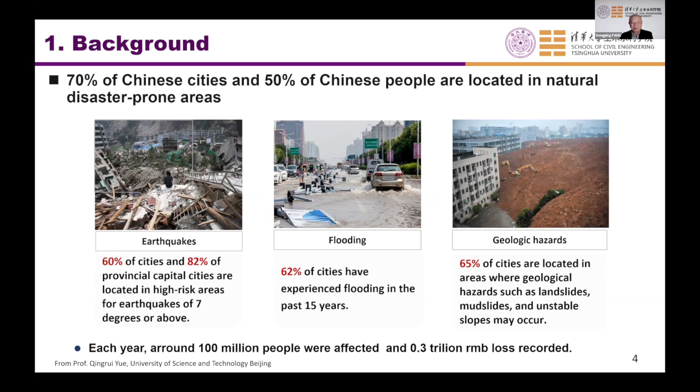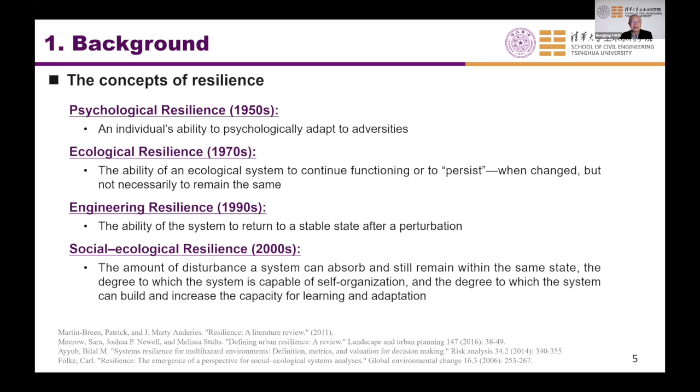It's defined as kind of the intrinsic property of a system. The system can be an urban system, can be an infrastructure system, as much as you can define. Function or functionality is another keyword that describes the goal and provides a measurement for the goal that could be reached. I'll explain a little bit later.

Disturbance specifies the context or type of disasters, such as flood or earthquake. The context can be very different because of the disasters. Resist and absorb is another keyword that stands for when disturbance comes, the system is able to resist or absorb the negative impact by itself. So by itself is a very important concept because we differentiate from outside aid.

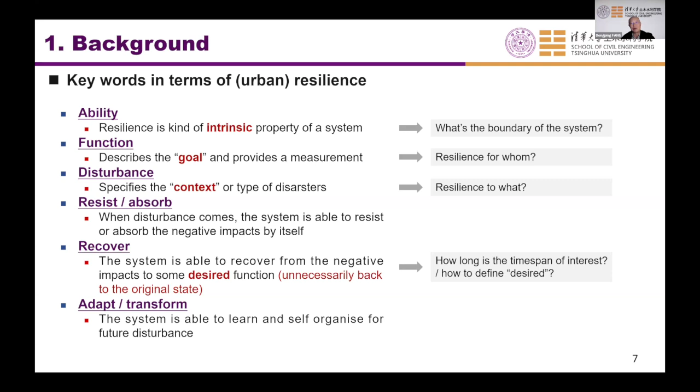So then, as for recover, it's related to how long is this time span of interest. The recover can be forever after disaster, especially for large major disasters. And then how to define desired functionality of a city — I'll answer all these questions alongside my presentation later on.

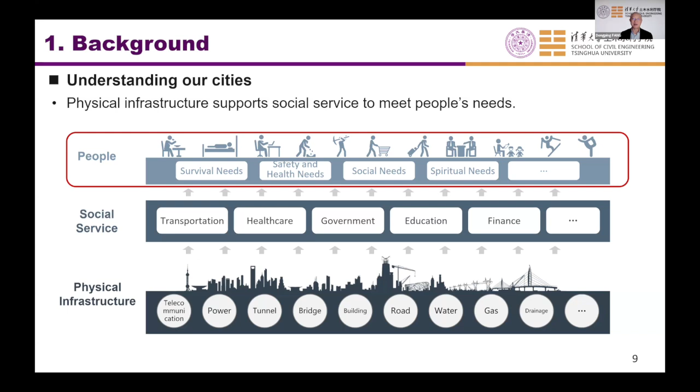And then there's another perspective called system of systems for understanding our cities. In a city, all the systems, different kinds of systems, have their role or functionality to serve the country, to serve the city. And they are all interdependent to some extent. So this is the figure to show you how they interdependent.

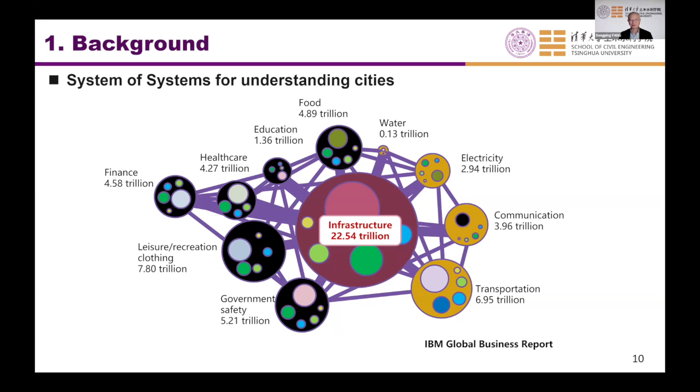And let's change to another perspective — that is what I call trio-space. That means we as engineers pay much more attention to physical spaces. It's related to natural environment and our built environment. It's all physical. But the city exists because of people living there. So the societal space is an unneglectable part of the city. So I call it the social space.

And in modern life, cyber is a must for all the citizens. So cyberspace is another one. It refers to the digital mapping to reflect the status of physical and societal spaces — the digital twin refers to this. But the cyberspace also supports the communication and operation of physical and societal spaces. So it's easy to understand because we all live in the city.

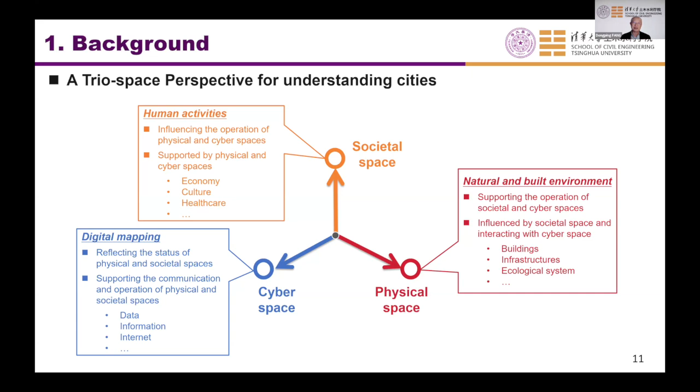So I showed you several kinds of angles to understand cities. I'm trying to bring the three perspectives together. First, put the system of systems into the trio-space, so we can have such a view of our cities. We call it the system of systems in trio-space.

This is a brief introduction to understanding the background of urban resilience, and the methodologies we used to conduct research in this area.

I started with two critical questions. First, how do the effects of natural hazards spread across different engineering systems, meaning physical systems, and across both physical and social dimensions, and what's vital. Second, how to better use limited resources, because no city, no local government, even national governments, have sufficient resources for resilience. Resources are always limited.

It's always the case that cities put resources into improving their safety and resilience, but may not do so in a very optimized or effective way. This is what we are trying to contribute to urban life.

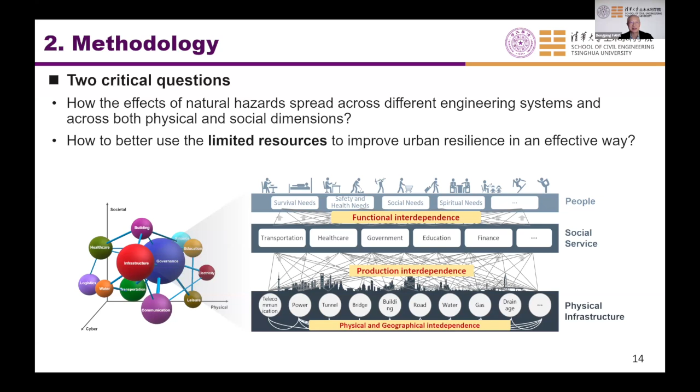In this figure, you can see the interdependencies, both physical and geographical, production interdependence, and functional interdependence. We are facing a very complicated system, so now the question is how to tackle this kind of complicated issue.

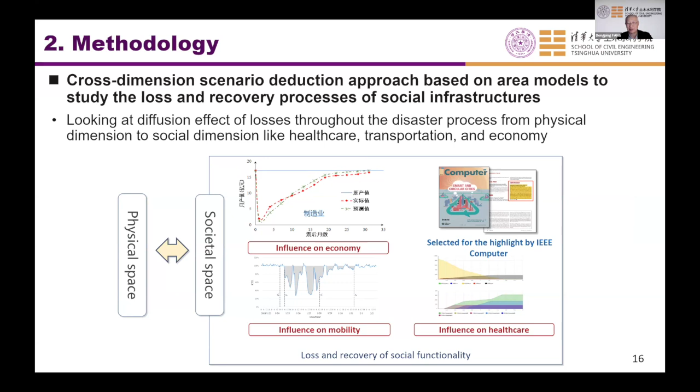So the second approach was developed, the cross-dimensional scenario deduction approach. This models the propagation of disasters from physical space to societal space—that is the cross-dimensional part. We used area models to study the loss and recovery process of social infrastructures, looking at the influence on economy, mobility, and healthcare systems.

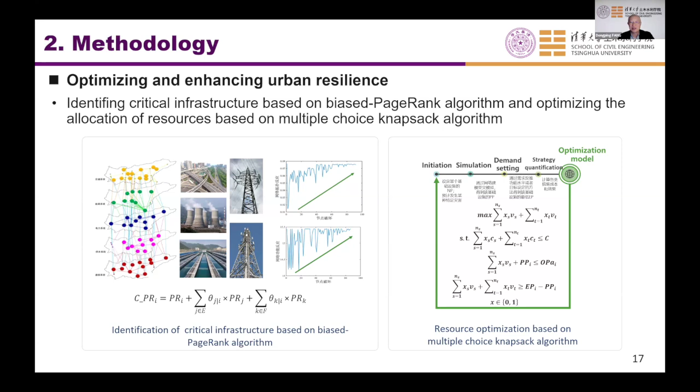We also developed methodologies to optimize and enhance urban resilience. Optimizing means we try to allocate critical infrastructure so major investment can be directed to these so-called critical infrastructures. We use a biased PageRank algorithm to identify critical infrastructure, and a multiple-choice knapsack algorithm to allocate limited resources to the right critical infrastructures. This concludes the methodology part.

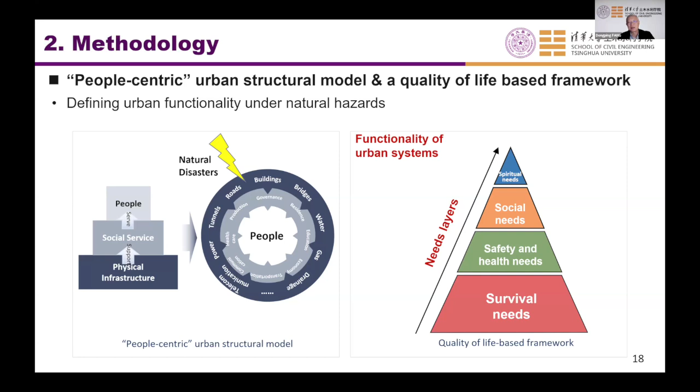Then we come to the people-centric approach. Look at the left figure—I folded the model I described before into such a sandwich, with people inside in the middle. That's why we call it people-centric. If you look at this model, you'll find that all the needs or functionalities can actually be defined by people's needs or the quality of life people experience after a disaster. So we try to develop a model and build an index system so that people's needs can be quantified.

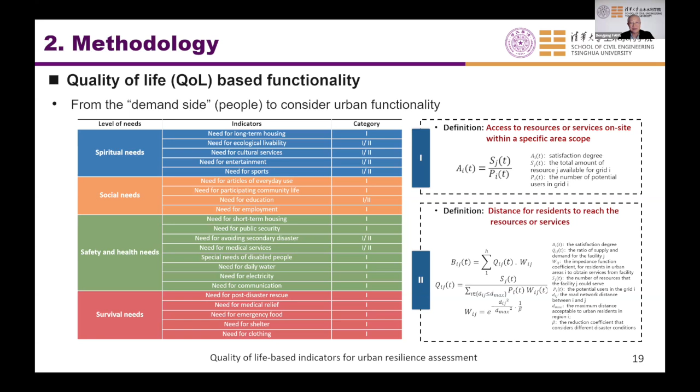This is the quantified index for people's needs, based on a huge amount of survey and data statistics analysis to group all the needs into several indexes. Now we have 22 indexes altogether to represent the functionality of urban systems.

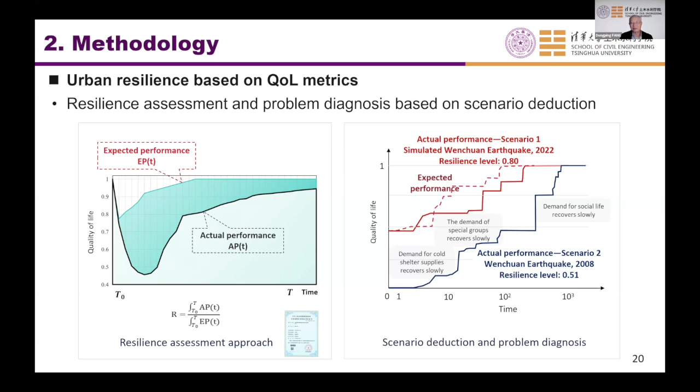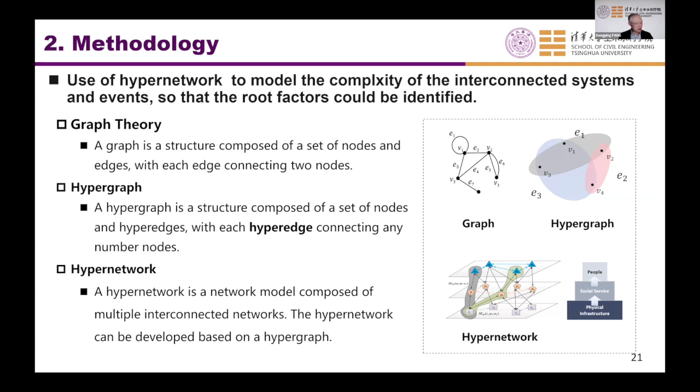I don't have time to go into details, but I'll briefly mention there are a few very important indices in the hypernetwork that can represent the performance of our urban systems. For example, the hyper edge, one of the KPIs in the hypernetwork, can reflect the dynamics of the quality of life of citizens. That is related to the indexes we developed to measure urban functionality.

I briefly introduced the methodology we used. It's not only one methodology, it's a series of methodologies. So I'll show you two cases where we used what we developed to look at real cities.

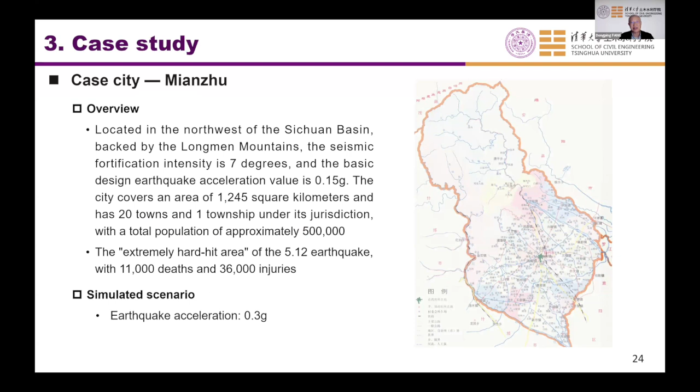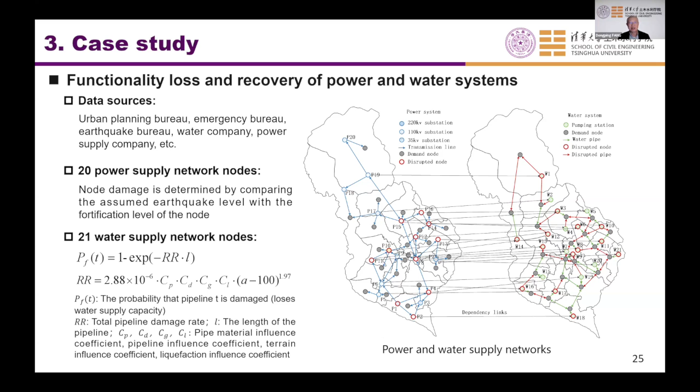One is Mianzhu, one of the cities that was heavily attacked by the Wenchuan earthquake 16 years ago. We investigated all its urban systems, and we developed models for power supply, for water supply, so that we can connect them into a physical system and network.

So that all the interdependencies of the two systems can be simulated like this. You can see the functionality of power and the functionality of water are closely correlated, and their recovery process can be different. It's all related to the interdependence of the two systems.

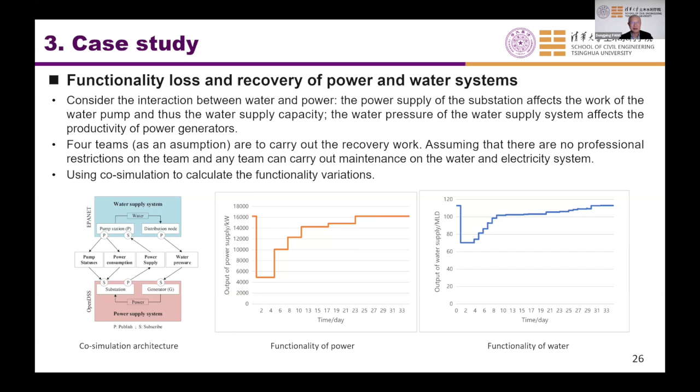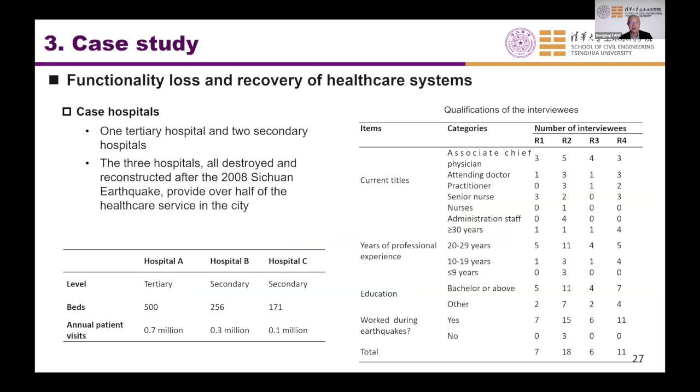So we use this kind of methodology to identify the key problems within our urban physical infrastructures. We also looked at the healthcare systems. We chose several hospitals and looked at the pre-hospital rescue process.

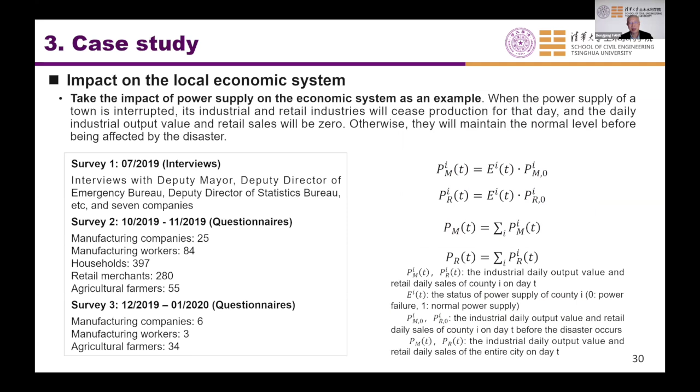We also looked at the impact on the local economic systems. Again, the industrial daily output and the retail daily output were presented here. It's all based on our simulation from the earthquake input, from the structural failure, to the damage to the industry output and retail output.

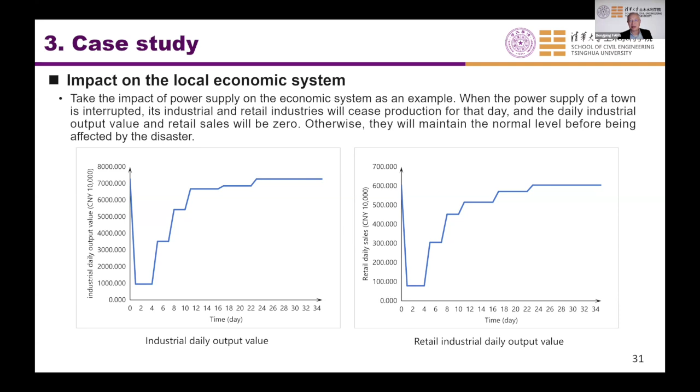Since the time is limited, I could not go into any details. Okay, summing all these functionalities together, and based on our indexes for human needs, or what we call quality of life, based on the indicators, we can have such a curve.

That is the actual performance. Of course it's simulated, because there's no earthquake happening today, but we used all the current infrastructure and urban information, based on the input from 16 years ago. So we can see the gap between the desired performance and the actual performance.

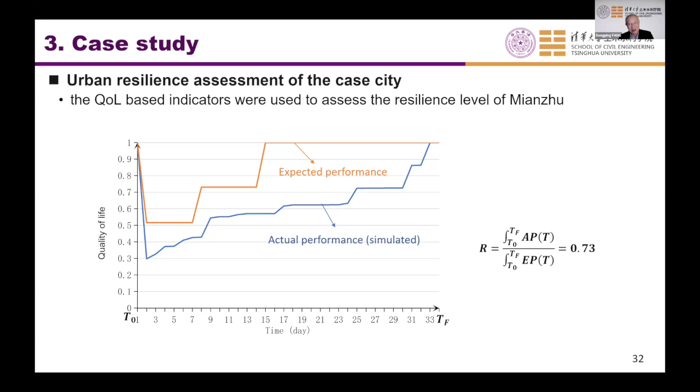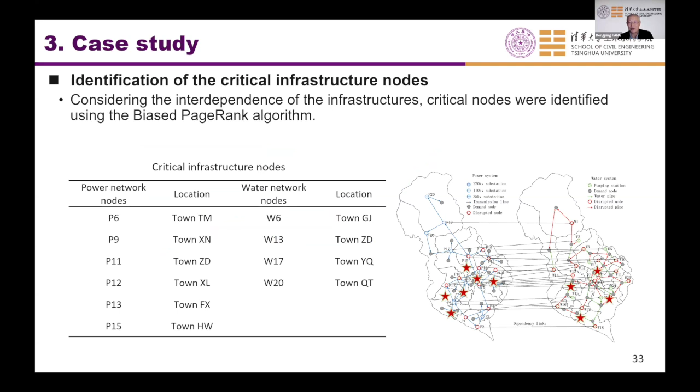So this is the gap we should pay attention to, and this is also the gap for resilience. Based on all these simulations, we start to identify the critical infrastructures, back to the case I expressed. Here the star was identified as the critical infrastructure, and then we developed different strategies to invest in these critical infrastructures. You will see different strategies may result in different resilience curves.

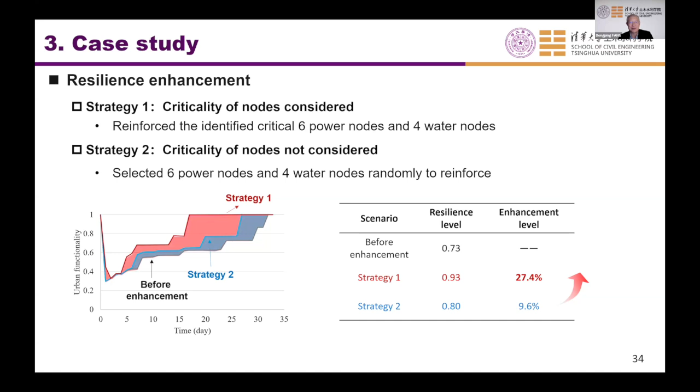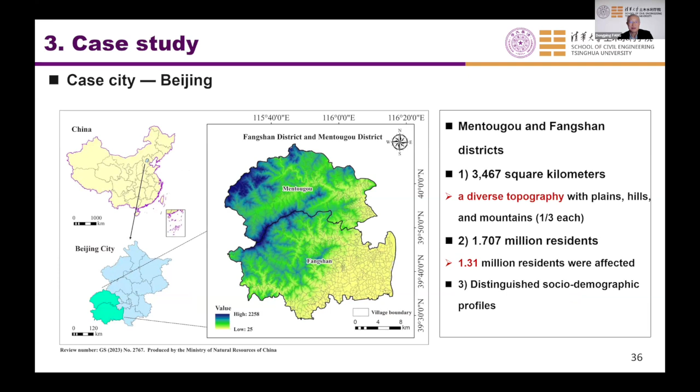The second case is happening in Beijing, a rainstorm in the past few years. We have two areas that suffered from the rainstorm-caused flooding.

Again, we use the same indexes, based on data collected from the platform used to take claims from citizens - for example, they don't have water, they don't have signals, and so on. This is a very effective platform for serving citizens in Beijing, and also a good data bank for us to analyze all the details of city performance.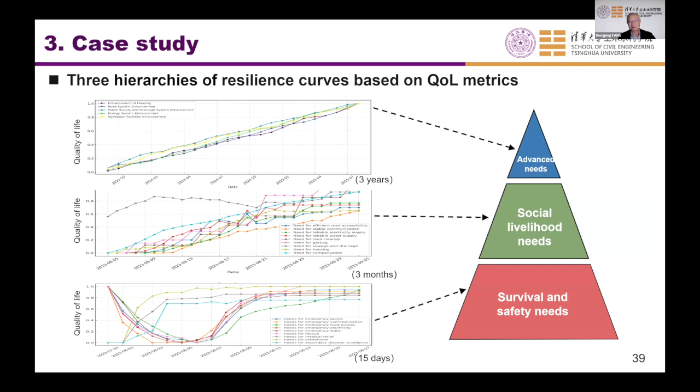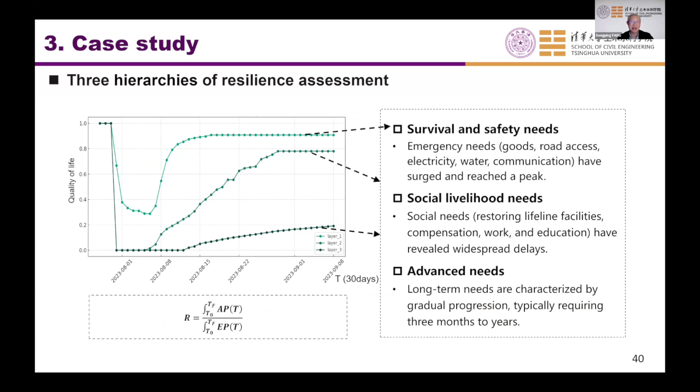This is the summarized curve for different levels of needs. We divided the needs into three layers, starting with survival and safety needs - that's the fundamental layer. You can see it recovers better and quicker, because that is the must, so the government pays more attention to it.

So I'll skip some parts. We compared our modeling with the real problems that happened in Beijing, trying to verify if our methodology is correct. We found it's basically in the same trend, but there's always some gap between the two. This is key - we are now looking at what this gap means.

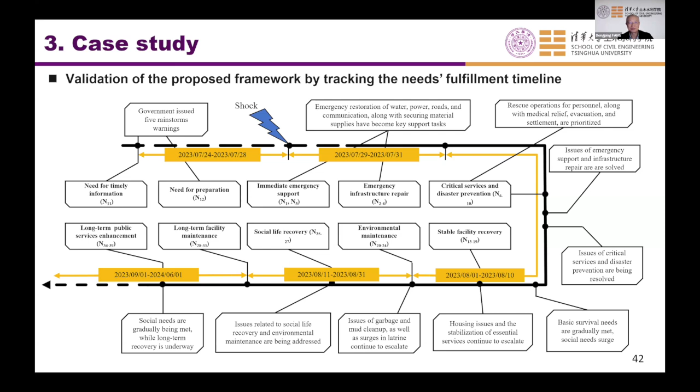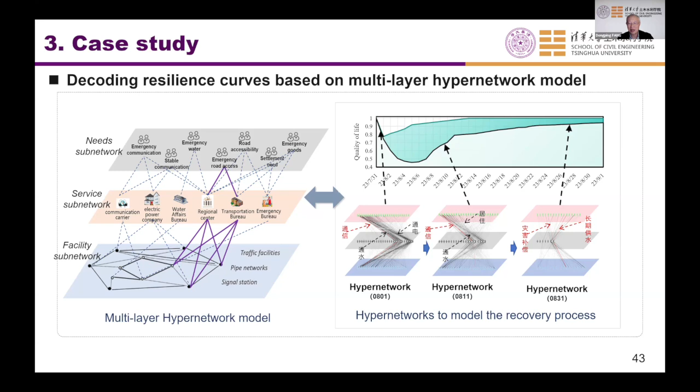So we also use the hypernetwork model to decode the resilience curves. We have only a curve, but we need to know the details - why it goes down, why it goes up, how we can make it go up quicker. This depends on the hyper network analysis.

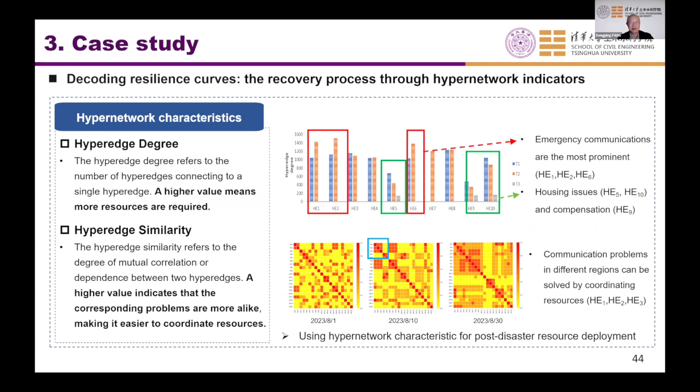A little bit of detail about how these indexes were used by us to analyze all the details of the causations of this functionality drop. I don't think I have time to go into details.

It's also related to the equality of citizens during the disaster. So we are still exploring and discovering more indexes from this methodology, so that more detailed use of these indicators can be discovered and put into practice.

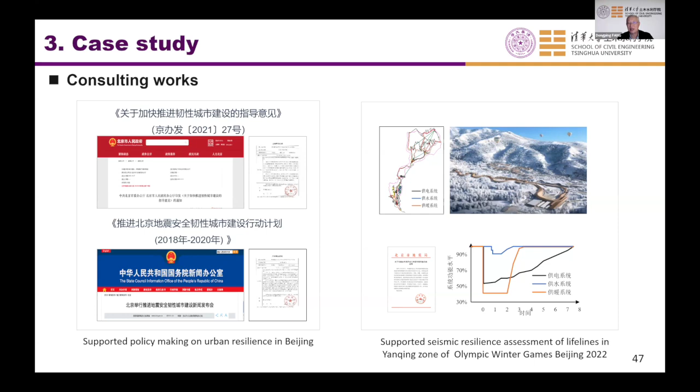Based on this method, our research has been involved in the policy making of the Beijing metropolitan government. We also helped evaluate the resilience of the Beijing Olympic facilities and residents.

Okay, in conclusion: a quantitative, human-centric or people-centric framework was proposed to assess urban resilience by tracking dynamic and hierarchical needs of residents after disaster. This is one of the things we've done.

Second, a cross-system and cross-dimensional approach was proposed based on scenario simulation and deduction to describe the diffusion of post-disaster losses - how the losses spread out - which enabled the identification of key infrastructure and better allocation of limited resources for quick recovery. All cities suffering disasters may recover, but we want them to recover quicker, because recovering quicker means citizens' lives can return to normal quicker, and the economy of the city can recover quickly, so citizens can have much less loss and a better life in the future.

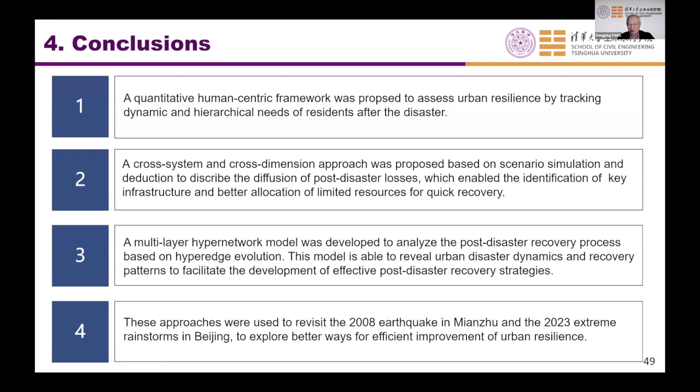So this is the work we have done in this area, but many parts have not been finished - it's all on the way. I hope the audience may also raise questions, if not today, later on by email, so that we can further improve this methodology.

Okay, thank you. And this is the work by a team of our faculty and students - Dr. Nan Li and Dr. Zaishang Li are key members of this team.

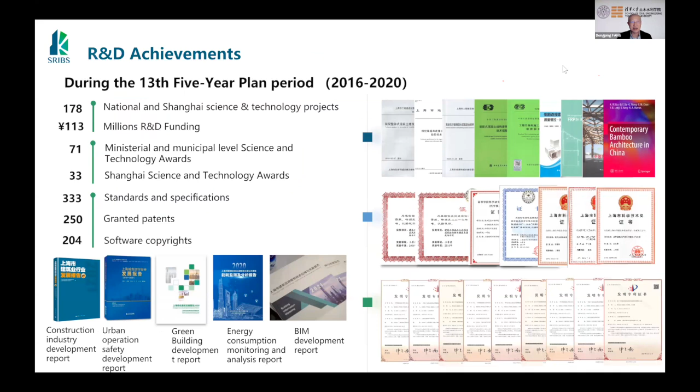I think the slides can also be shared, but let me quickly show you what happened at the Shanghai Research Institute of Building Sciences. It was established about 60 years ago and focuses on green and low carbon development, urban maintenance and organic renewal, and comprehensive digital transformation. The introduction could be long, but let me move to the outcomes of the institute and their achievements in this area.

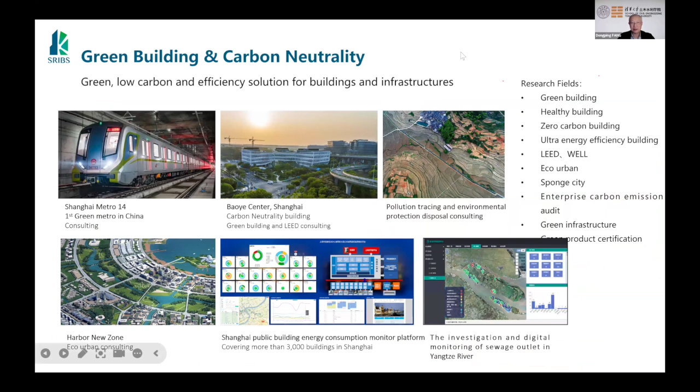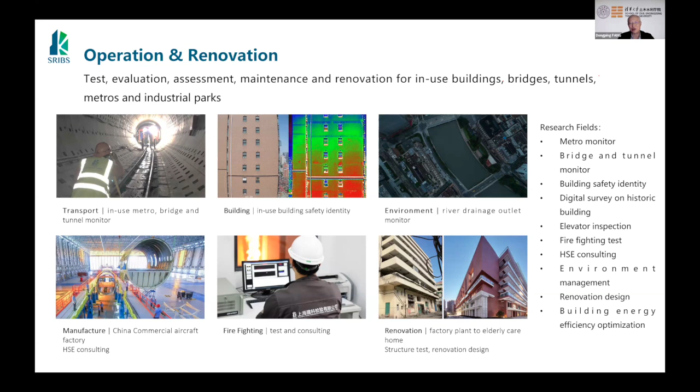First, green building and carbon neutrality - they did a lot for the industry. Then operation and renovation in the city, with most of their services within Shanghai. Shanghai is a major mega city, so there's a huge need for testing, evaluation, assessment, maintenance, and renovation for in-use buildings, bridges, and tunnels. This is a big issue now in China.

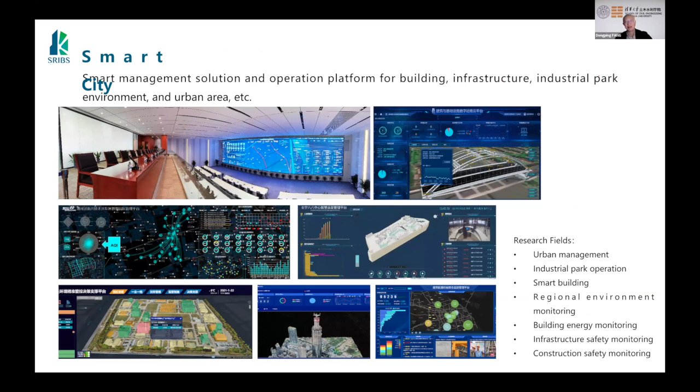And they have smart city related research. For typical service cases, you can see they do a lot in Shanghai, but also projects in Beijing and even in Haifa, Israel, and Cambodia, among others. So they try to be an international institute in this field.

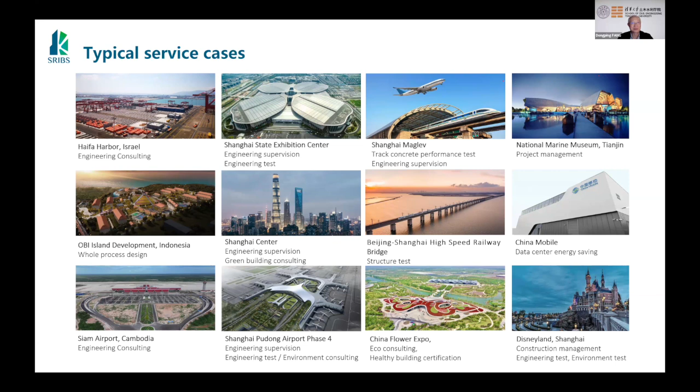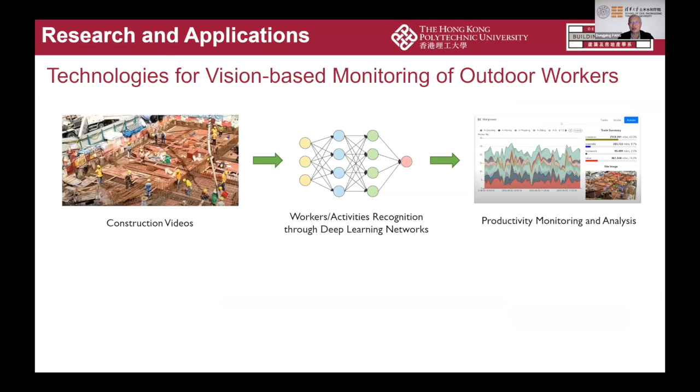The second part is about Hong Kong Polytechnic University. With limited slides, they represent some typical technologies for vision-based monitoring of outdoor workers - this is a big issue in our industry. They also do work task recognition and productivity analysis.

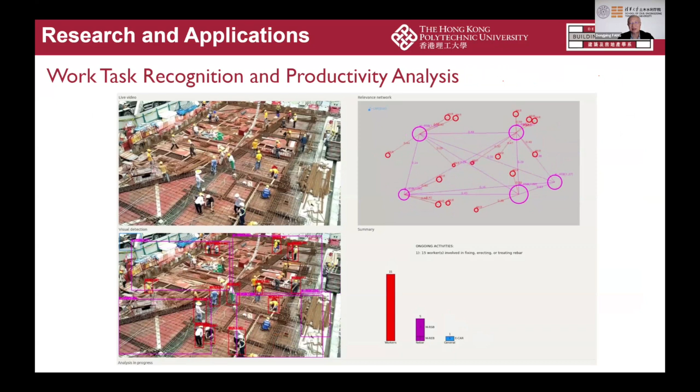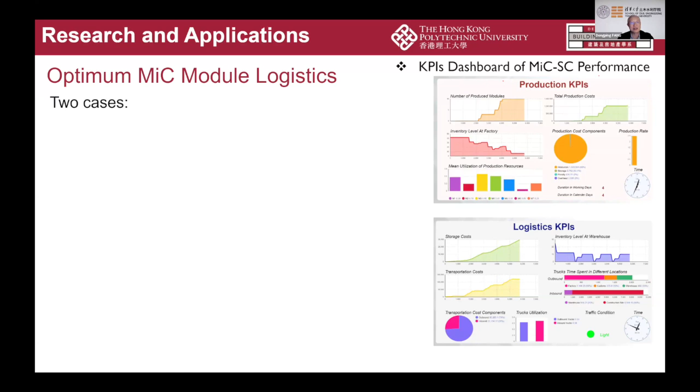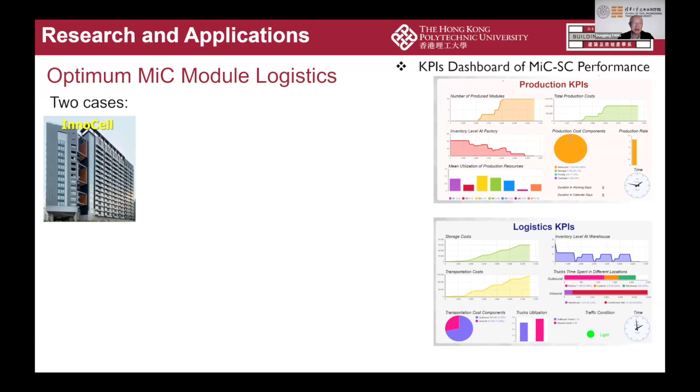Now it's very popular for MIC - modular integrated construction. This means precasted elements are transported to the site and installed there. MIC is now very popular in Hong Kong and mainland China, initiating lots of studies for these technologies. Now a 17-floor tower can be built using MIC.

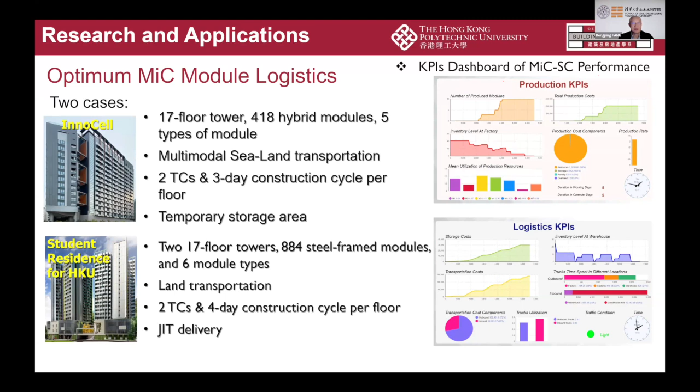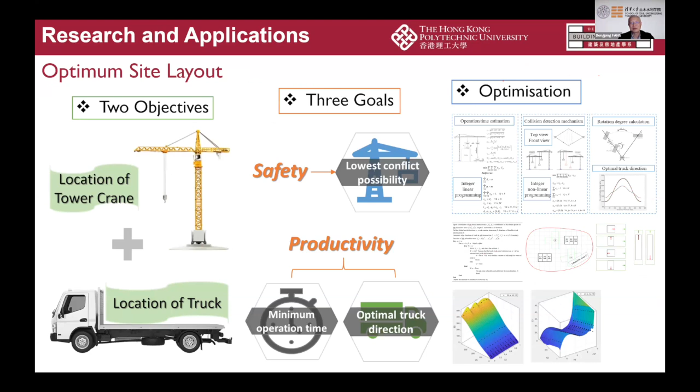The optimization of site layout is another area conducted at Hong Kong PolyU. Because in Hong Kong the site is very narrow, site layout is very important. This is all about site layout.

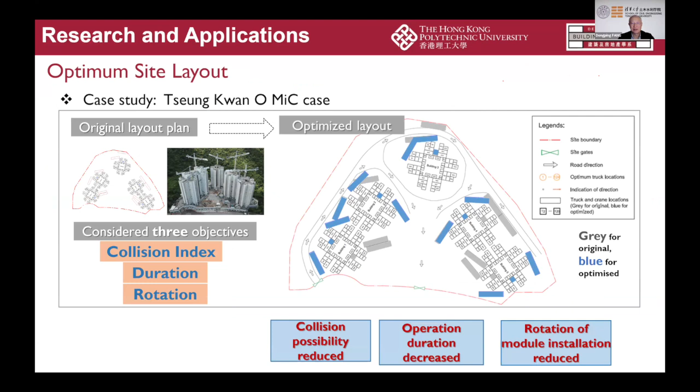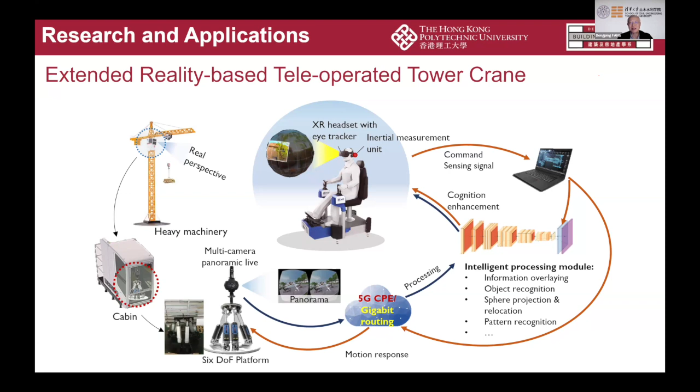Extended reality-based teleoperated tower crane is also a challenge now, but many groups are looking at this because if realized, there would be a big increase in productivity and safety as well. Dynamic information processing and visualization is also for the construction site - their research is quite advanced in this area.

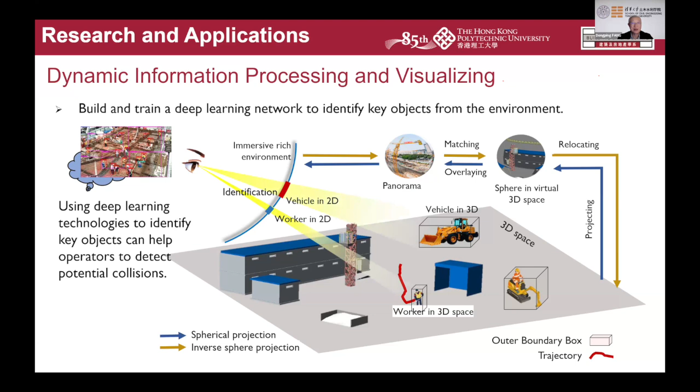And 3D printing in construction - lots of new technologies and capabilities can be developed based on 3D printing.

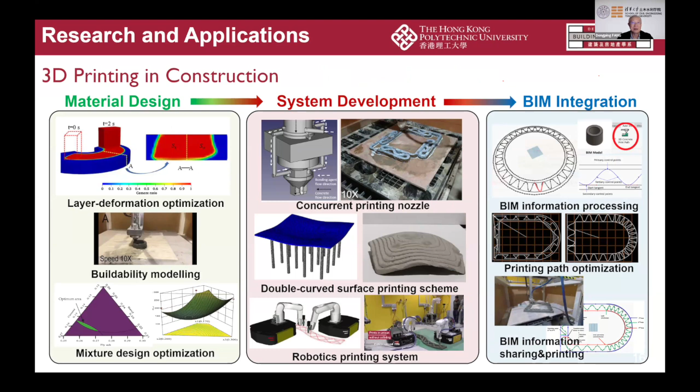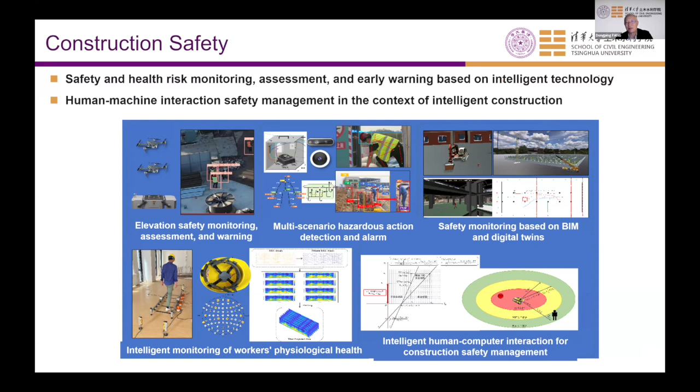Okay, then coming back to my school - we have a group of faculty working on construction safety, safety and health risk monitoring, assessment, and early warning based on intelligent technologies that have been developed. This work involves human-machine interaction and safety management, mainly done by Hongling Guo's group and my group. We work together on this.

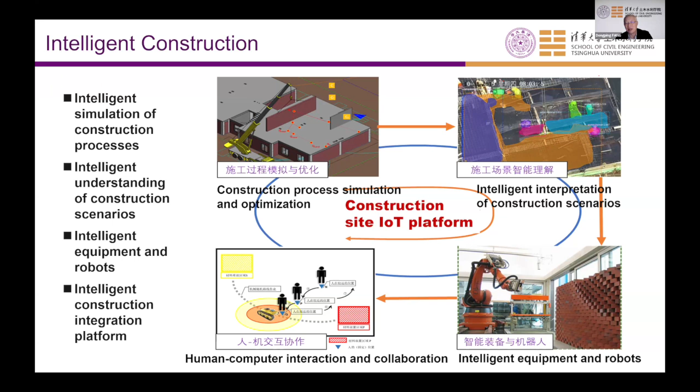And the construction site IoT platform - this is in huge demand in China. We do a lot for construction companies and it's quite well welcomed. So a few projects have been implemented with our technologies.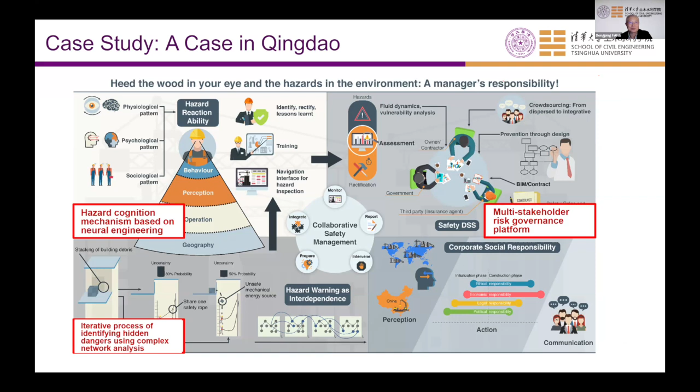And this is lift path planning we have conducted, mainly done by Dr. Guo in Hong Kong. We developed lift path planning for improving the productivity of cranes and concrete casting.

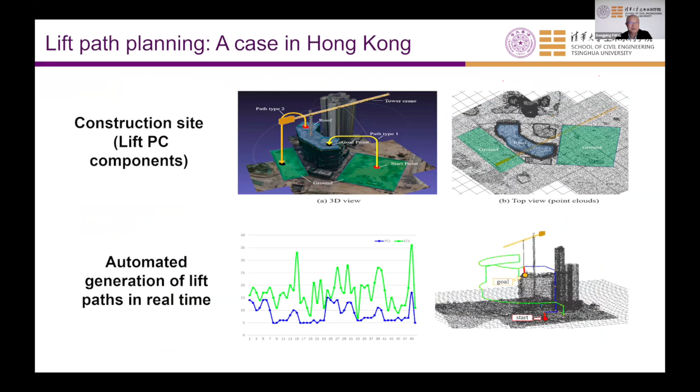Carbon emission is another part that we have a group of people working on. Quite a few national standards were developed to try to enforce the industry to decrease their carbon emissions.

Okay, this is the very brief summary of the three members' work in this field. So I would like to end my presentation today, but I think the time is already a few minutes past the time limit. So Mark, is there any questions I should answer?

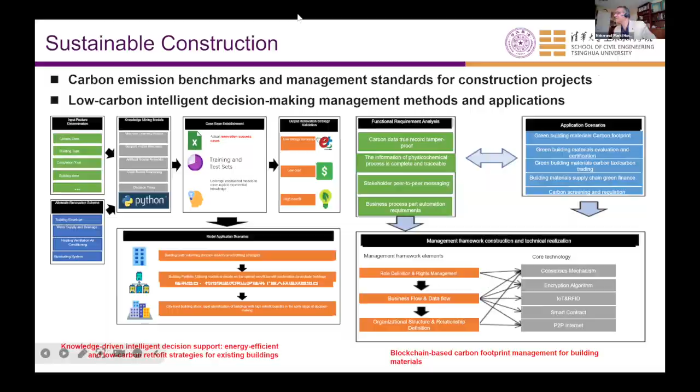Yeah, of course. No, thank you, Professor Fang. That was a very nice presentation, and thanks for covering a broad area, starting with resilience in urban environments to the work that is being done by three very prominent CIB members in that region. Indeed, a lot to cover.

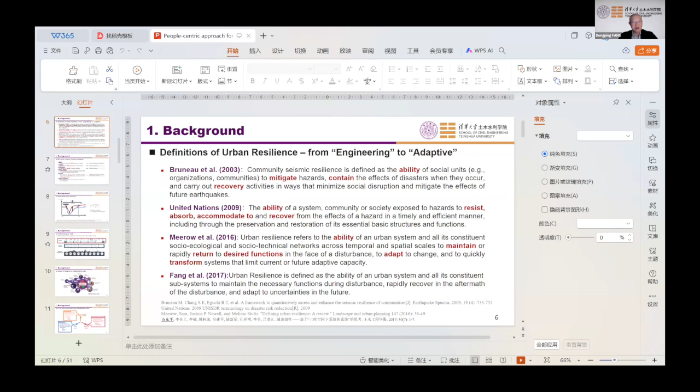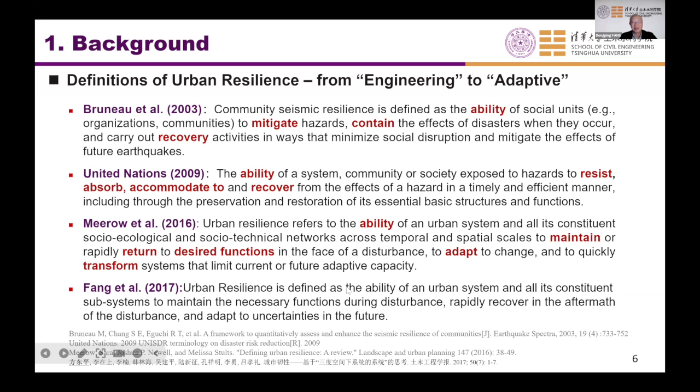No, I think that is quite important, right? I mean, that is the basis of how we all position ourselves in terms of what that resilience should be. So I quite agree with the definition that you proposed. I see that Dave has put a question in the chat, and he says: for research in China at universities, what are the primary sources of funding?

Okay, good question, and it's an easy question for me. Thanks for your interest. I think the Chinese universities has resources from several parties. First is the National Natural Science Foundation of China - this is the major and high-profile foundation for the Chinese universities. The second is from the Ministry of Science and Technology, and this ministry always tries to organize research projects, something like 2 or 3 million US dollars or above. For that kind of projects, we need to group not only one university, maybe a few universities together to apply for it.